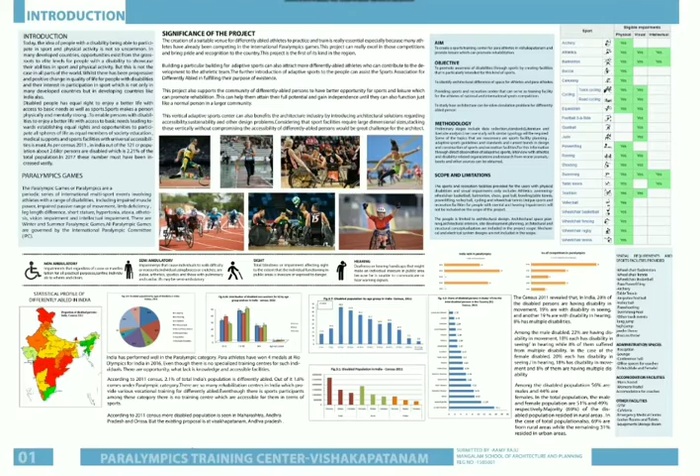My thesis topic is Paralympics Training Center in Visakhapatnam, Andhra Pradesh. It is mainly a live proposal. Project Introduction: the main aim of the project is to create a sports training center for para-athletes in Visakhapatnam.

The main scope and limitation of the design is that it includes user categories like physically disabled and visually impaired people, physically disabled like wheelchair users, limb deficiency and leg length differences, and visually impaired like partially and fully blind people. Sports and recreation facilities for people with mental and hearing impairment are not included in the scope of the project.

Talking about the feasibility of the project, according to the 2011 census, 2.1% of the total population is differently abled, out of which 1.6% comes under the Paralympics category. There are many rehabilitation centers in India, but there is no training center accessible to them in terms of sports.

According to 2011 census, more disabled population is seen in Maharashtra, Andhra Pradesh and Orissa.

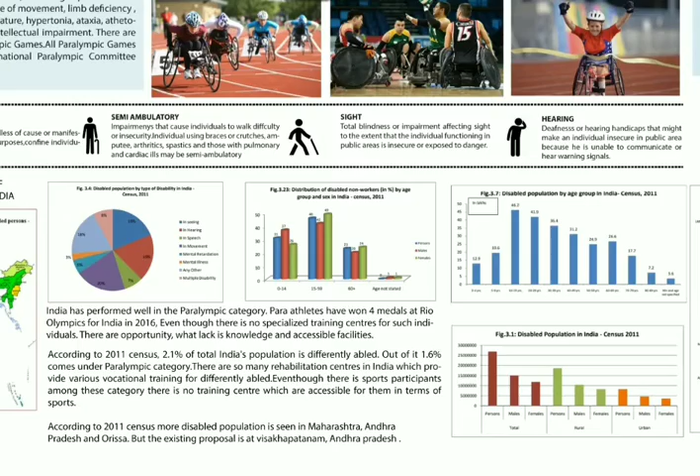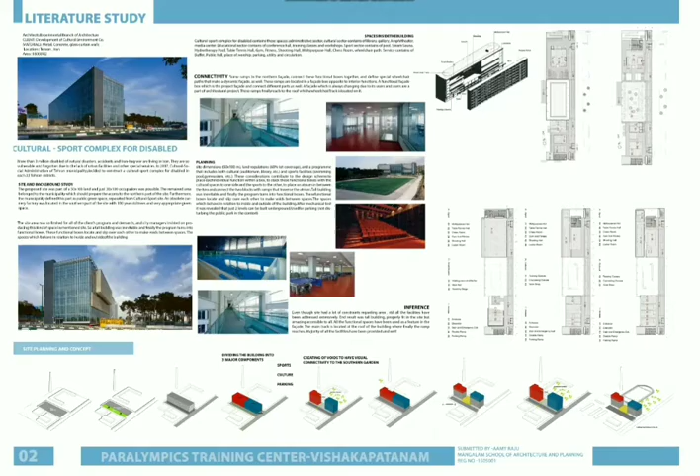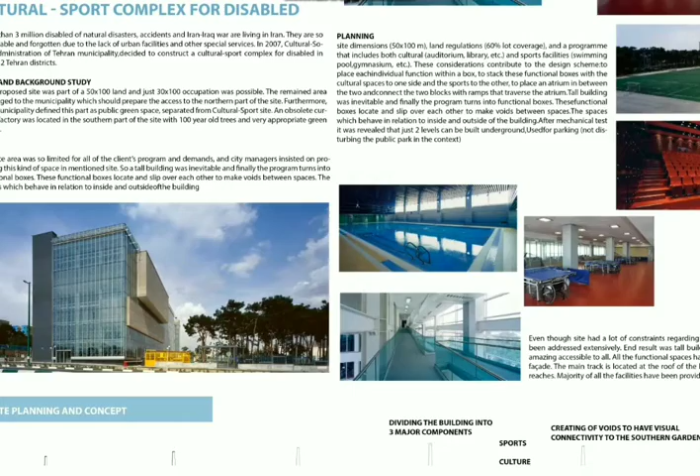Literature case study: Culture Sports Complex for Disabled in Iran, by Experimental Branch of Architecture, having an area of 18,000 square meters. The site has a lot of concern regarding the area - the site was limited, still all the facilities have been addressed extensively. The end result was a tall building properly fit in the site and accessible to all.

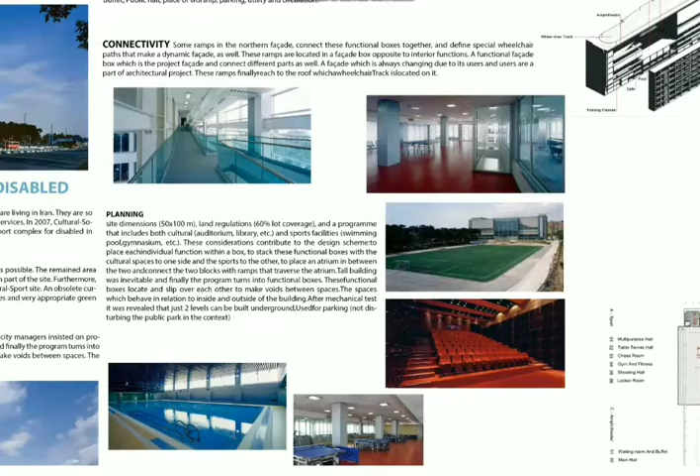The space inside the building is divided into three sectors: administrative sector, culture sector and educational sector. There is no other outdoor play area provided and also no accommodation provided within the building.

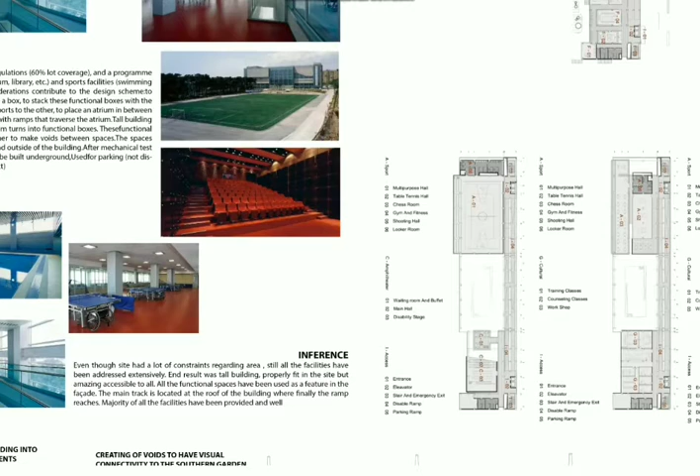The functional blocks are located and slip each other to make voids between them. These spaces are connected by ramps in the northern facade. It connects these functional boxes together and defines a special wheelchair path that makes a dynamic facade. This ramp finally reaches the roof where the wheelchair track is located.

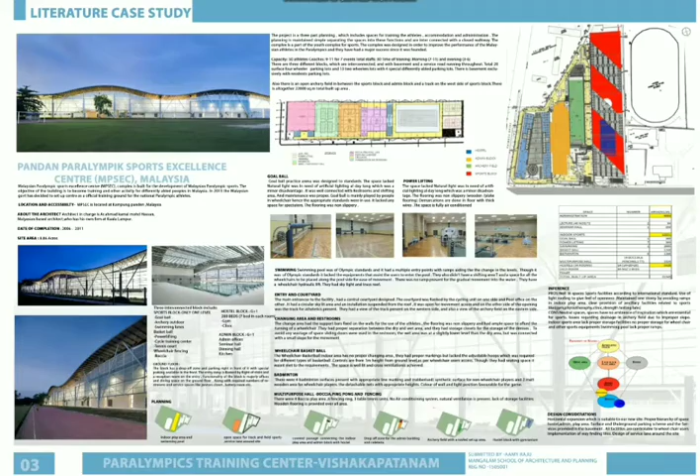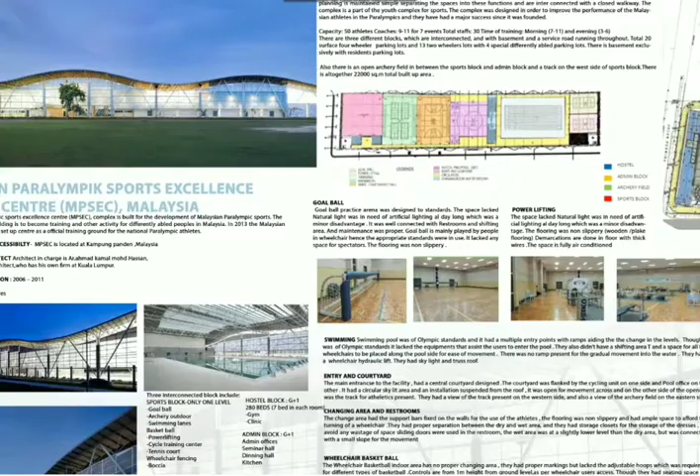Pandan Paralympic Sports Center in Malaysia, by Malaysian-based architect Ark Ahmad Kamal, having a site area of 8.86 acres. The site is divided into three parts: sports block, admin block, and hostel block. It is maintained as one-story to avoid ramps in the indoor play area.

It also follows international standards - flooring provided is non-slippery. Controls provided are 1 meter height from ground level as per wheelchair users. The planning is maintained simple, separating the space into functions interconnected with closed walkways. All the facilities are accessible to wheelchair users.

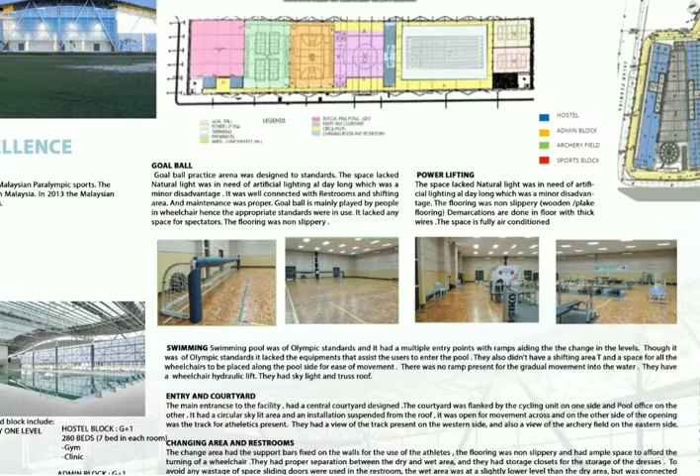Implementation of wayfinding checks is one of the main advantages. The main disadvantage is that the swimming pool lacks proper accessibility, and also spaces use dull colors and have a long distance to the field.

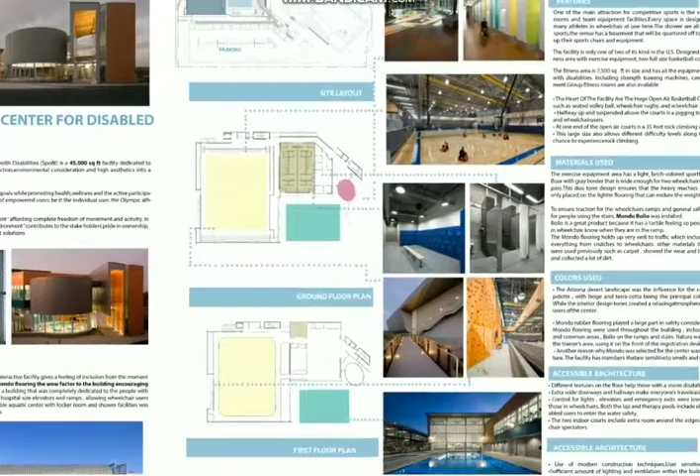The complex has a very compact planning with specific form. Both fitness as well as sports facilities are given equal importance. They provide hospital-size elevators, Mondo flooring for safety consideration, and also provide an accessible aquatic center with locker rooms.

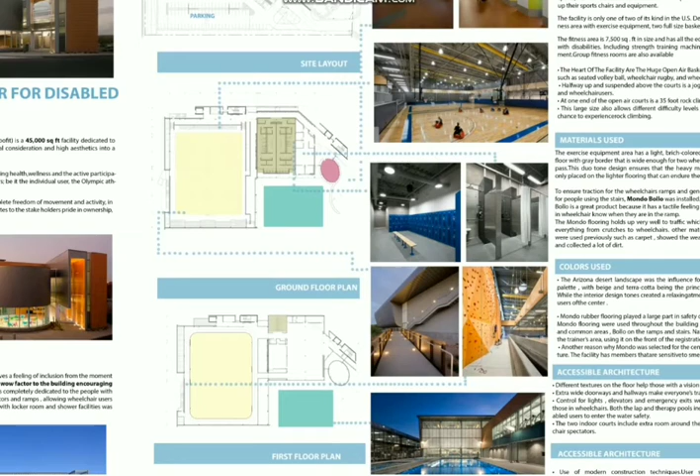Different textures on floor help both vision disabled and wheelchair users. Even the smallest of details are given importance. They also use proper material for safety as well as aesthetics.

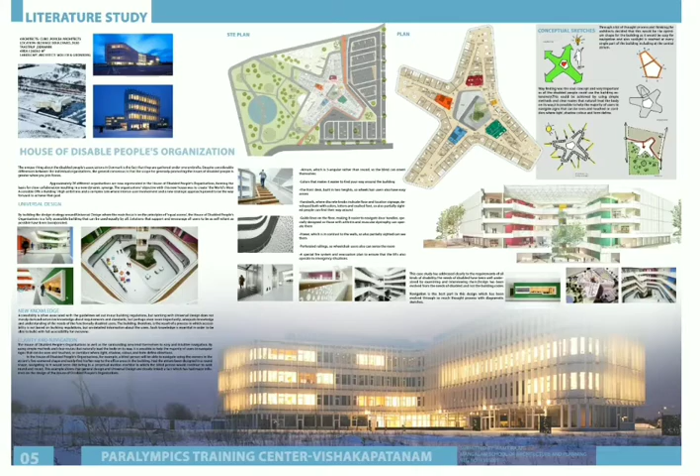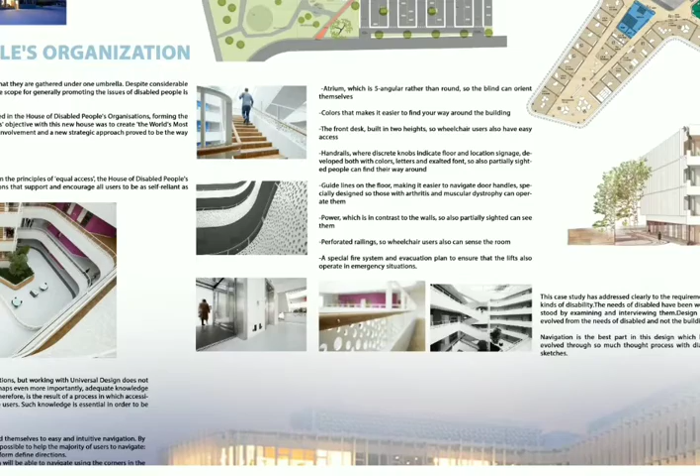Next is House of Disabled People Organization. This case study helps us understand the features and spacing for disabled people, like providing colors, handrails, guidelines, contrast colors, perforated railing, etc.

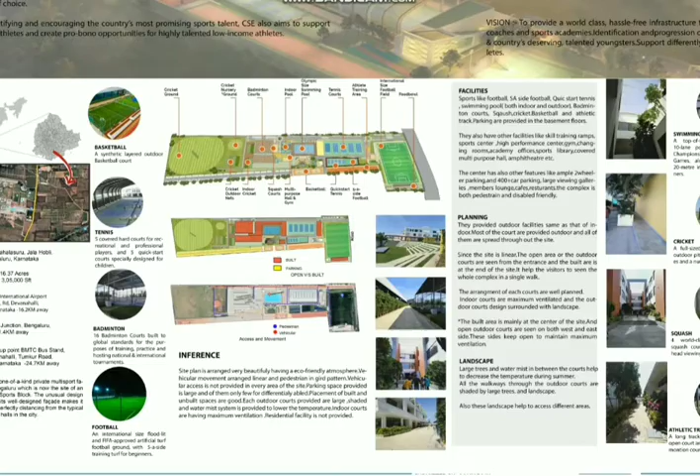Next is the live case study, the Padukone Dravid Center for Sports Excellence, located in Bangalore, having a site area of 16.37 acres. The provided facilities include basketball, tennis, badminton, football, swimming, cricket, squash, etc.

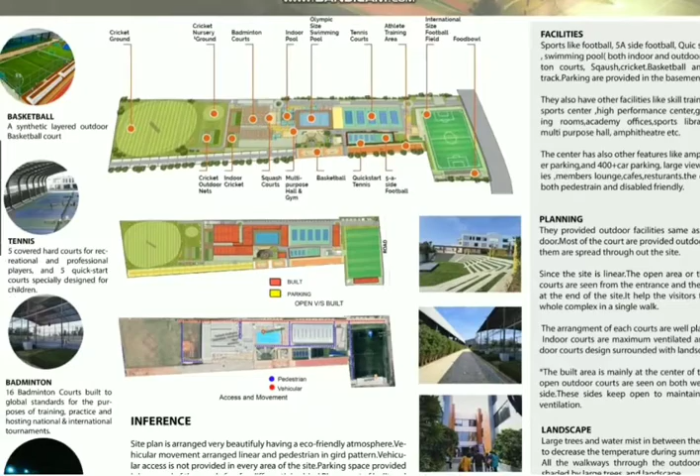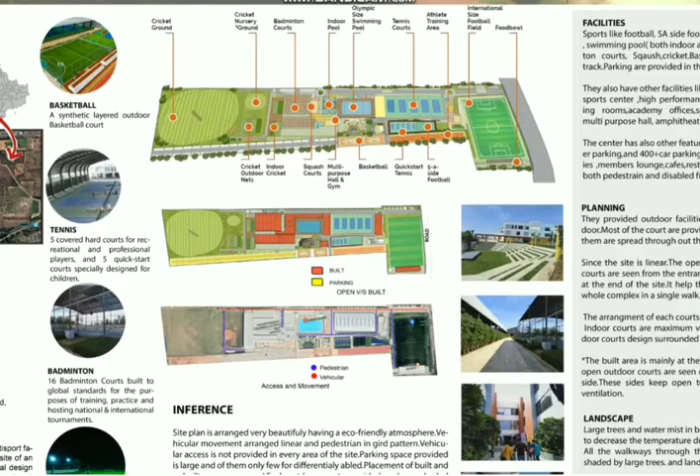The site is mainly linear. Indoor and outdoor play areas are given equal importance. Arrangement of each court is well planned. Indoor courts are maximum ventilated. Outdoor courts are designed surrounded with landscape. They also provide disabled parking, entrance ramp, and toilets for disabled.

Next live case study is the National Association for Blind, Bangalore. This case study is mainly used to understand the space and features used for blind people - features like providing color contrast for steps, handrails, doors, etc.

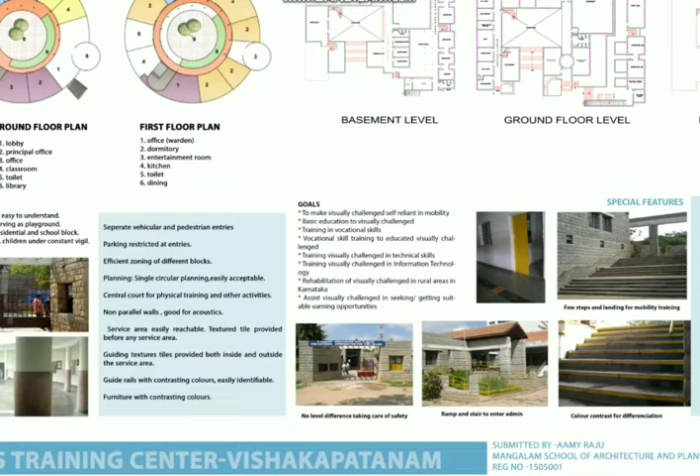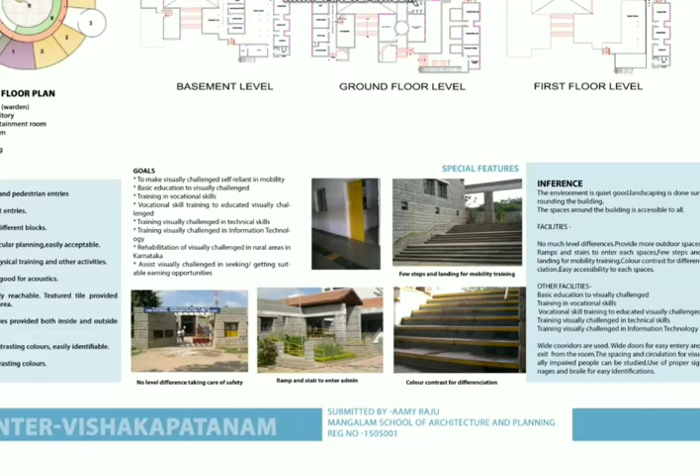Avoiding level differences, using wide corridors, wide doors for easy entry and exit, also use of proper signages and braille for easy identification. These are the comparative analysis of the case studies.

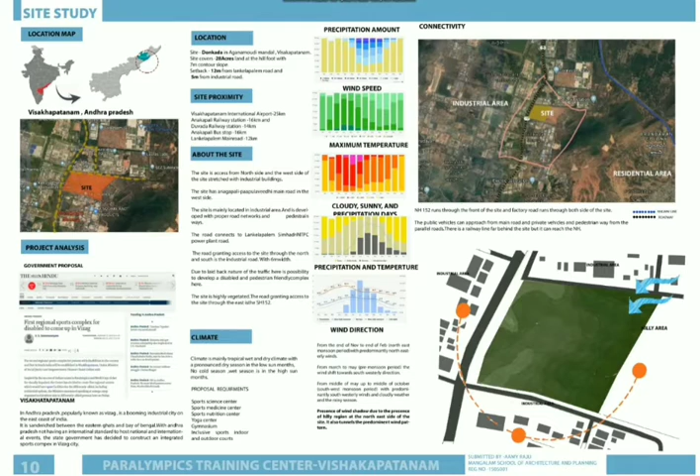Next is site study. The site is located in Visakhapatnam, Andhra Pradesh. It is basically a live proposal, located in Donkada region of Agonamoodi in Visakhapatnam.

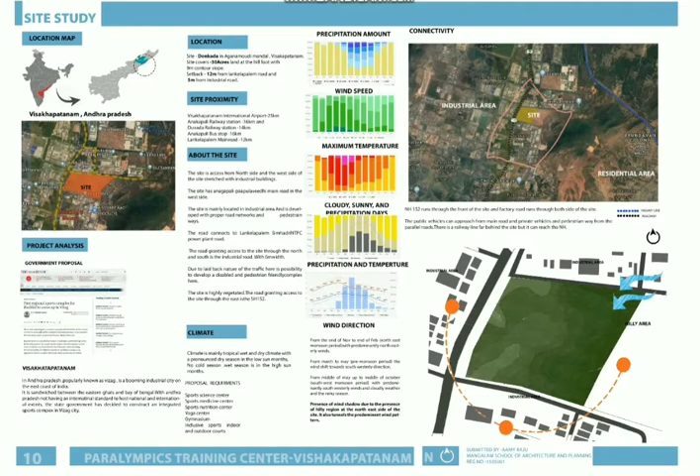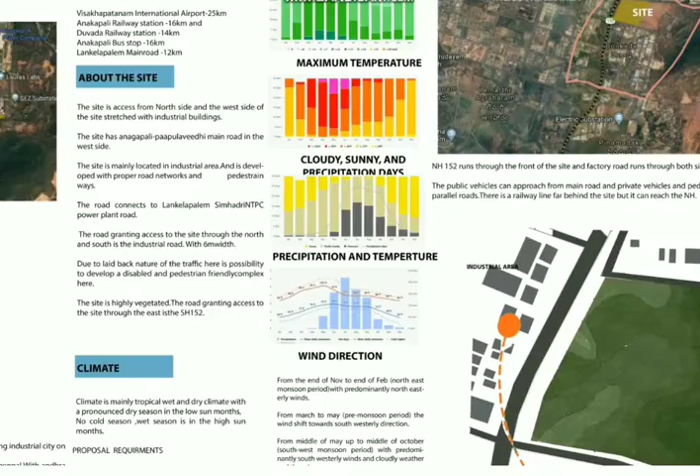It covers 30 acres of land. Also, it is located in an industrial area and is developed with proper road network and pedestrian walkways. The site consists of a 9-meter contour slope.

Site analysis: NH 152 runs through the front of the site. Also, the existing road surrounding the site can be used as service road or pedestrian roads. Also, at the right side of the site is a hilly region which provides a good backdrop to the complex.

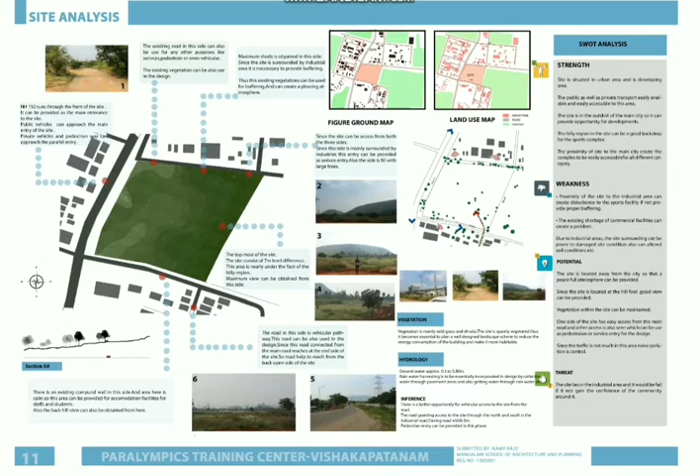Next is design brief. The total built-up area is 16,411 square meters.

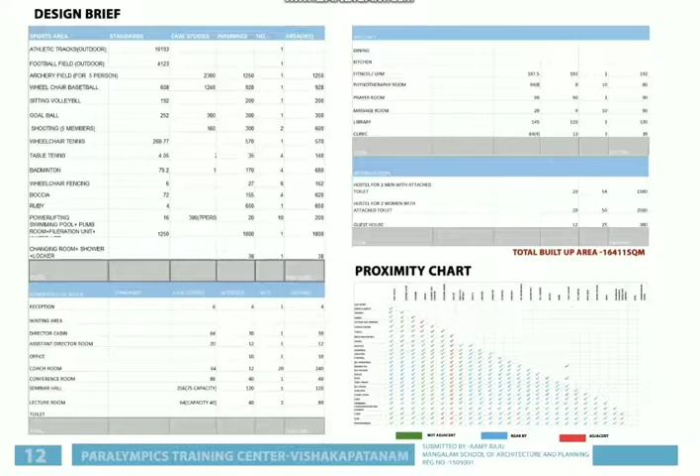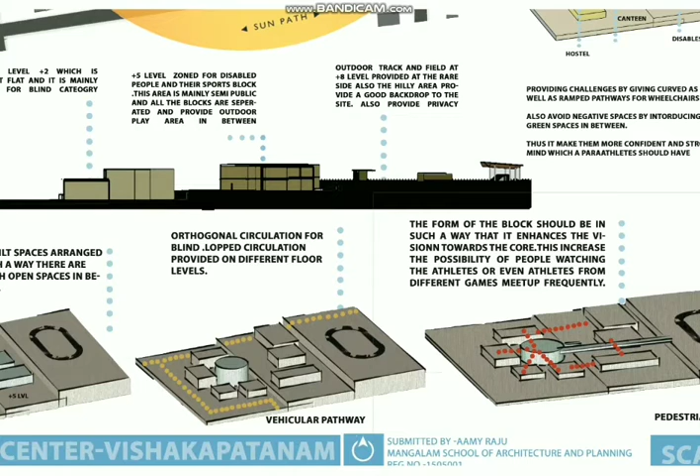Site plan: the site is located in Visakhapatnam. The site is divided into 3 levels - plus 2 level, plus 5 level, and plus 8 level. The site is zoned based on user category.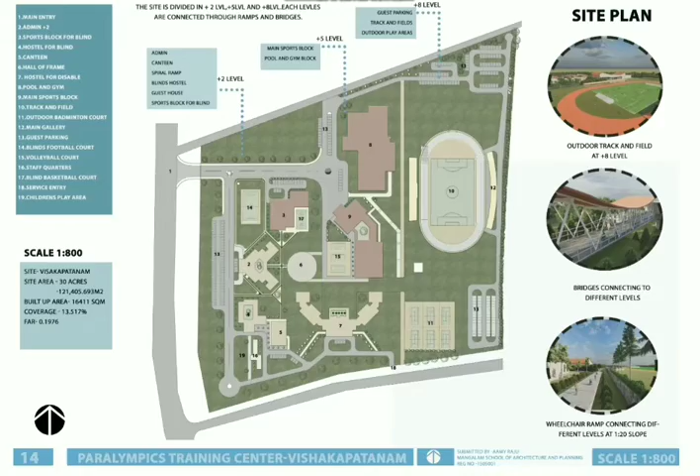The entrance is from the main road, which reaches the admin block at plus 2 level. This level is zoned mainly for the blind category. Other than admin, it also provides a sports block for the blind and a blind hostel.

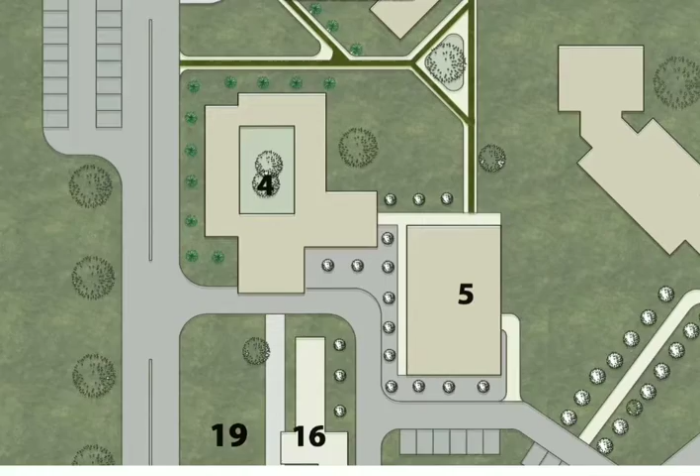Other than that, there is a common canteen, guest house, and Hall of Fame. The Hall of Fame is a central core block which is connected to each level through bridges for easy access for disabled.

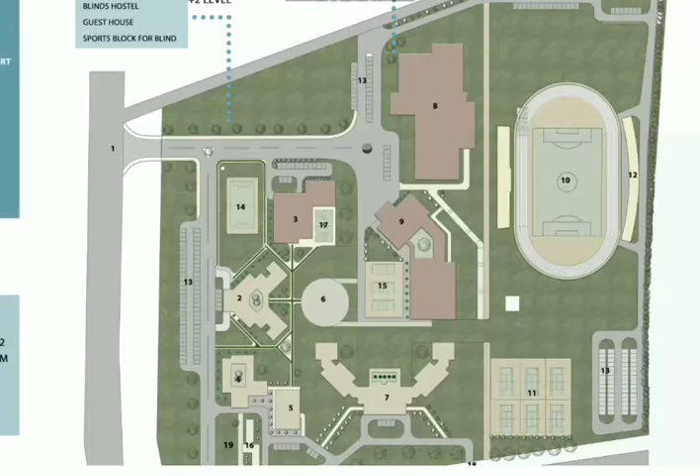At plus 5 level, it is mainly zoned for disabled people, having their main sports block, pool and gym block. Also, hostel for disabled.

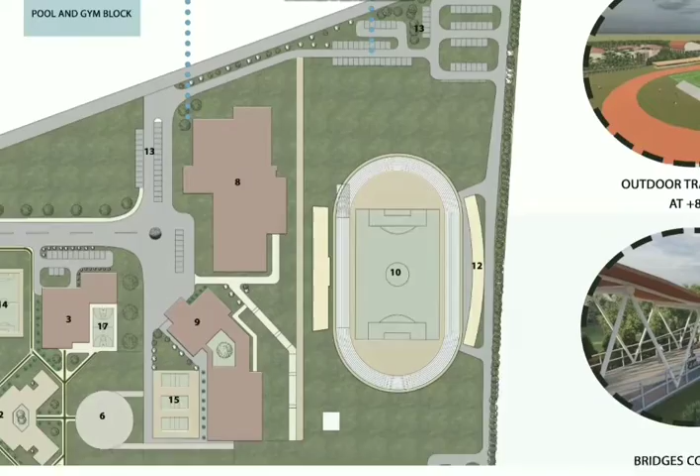Plus 8 level is zoned mainly for outdoor track and field. Parking is also provided in this area. The hillside near the play area provides a good backdrop for the complex.

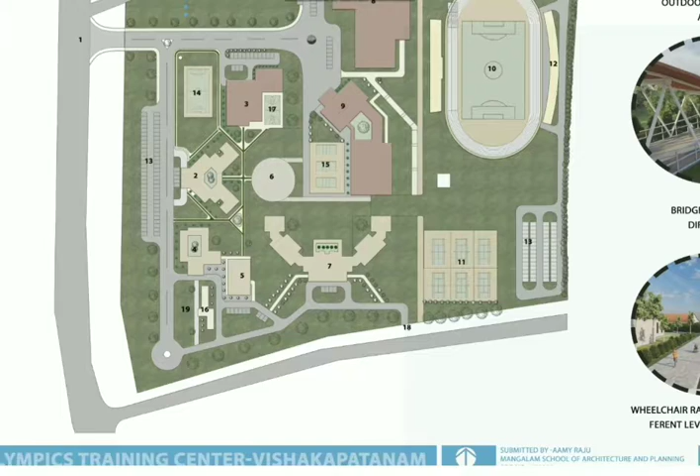These are the wheelchair ramps connecting different levels at 1:20 slope. These are the bridges connecting different levels and outdoor track and field at plus 8 level.

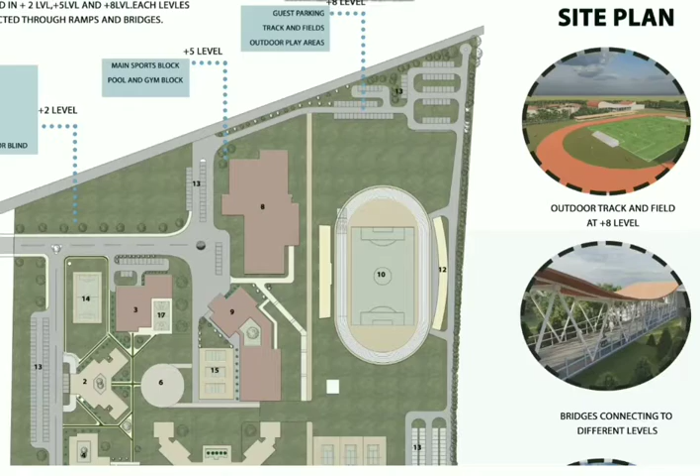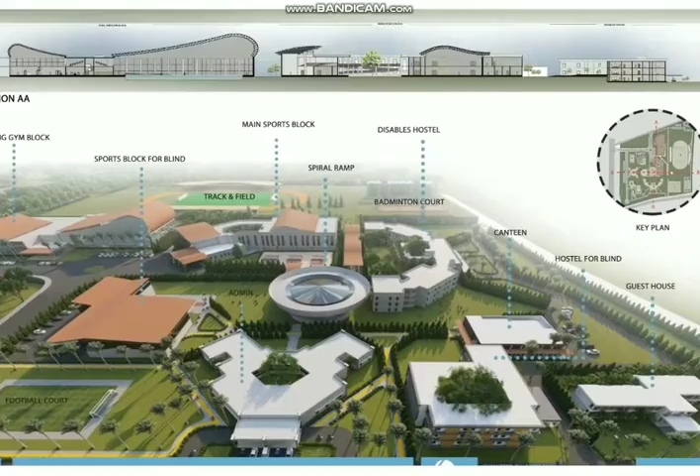Site section BB and site section AA. This is the overall view of the site showing admin, sports blocks, pool and gym block, track and field, hostels, canteen and guest house.

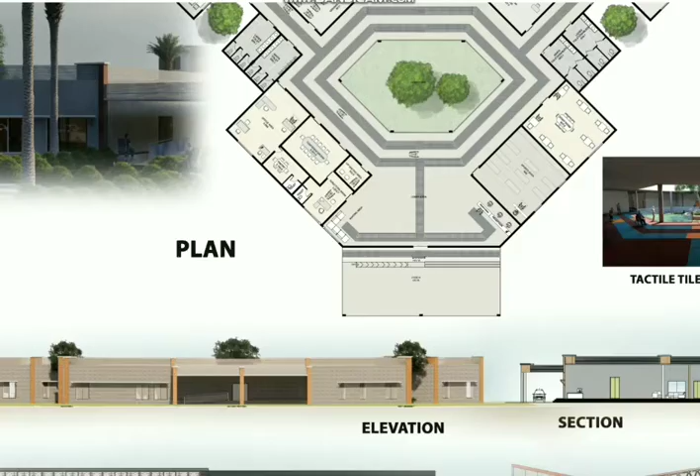Provided ramps and steps at the entrance, tactile tiles for blind, wide corridor of 4 meter width. Office spaces are provided at the front, separate toilet space for staff.

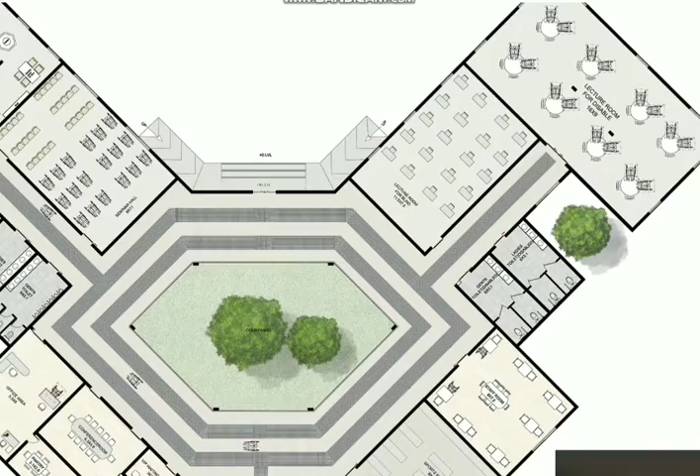Other facilities like library, seminar hall, lecture room for blind and disabled are provided. Separate toilet for disabled are provided. View of tactile tile and courtyard views.

Next is the floor plan of sports block for blind at plus 2 level. Sports provided are mainly for blind like goalball, badminton and judo. Tactile tiles surround each court.

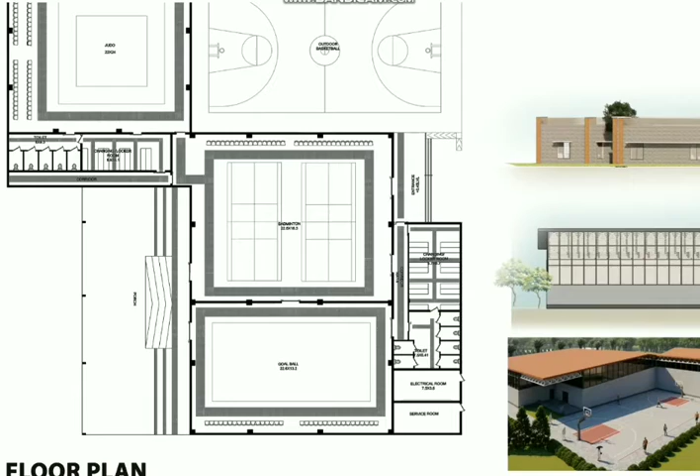Each court containing separate changing room, locker room and separate toilets. Separate seating are also provided within the block. This is the outdoor basketball near the sports block.

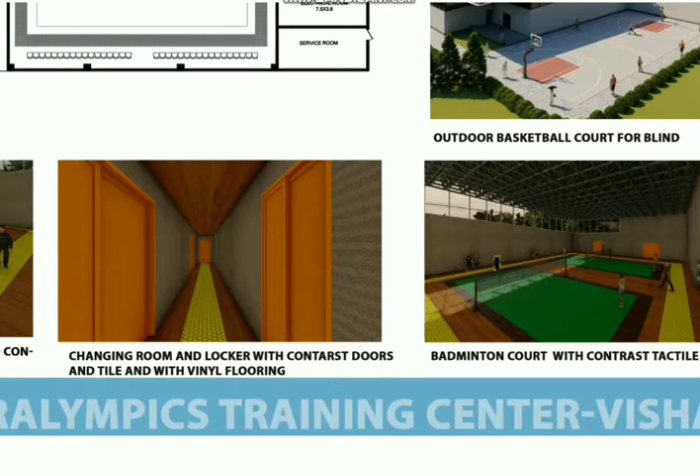This is a view of changing room and locker room with contrast doors and tactile tile for partially blind people.

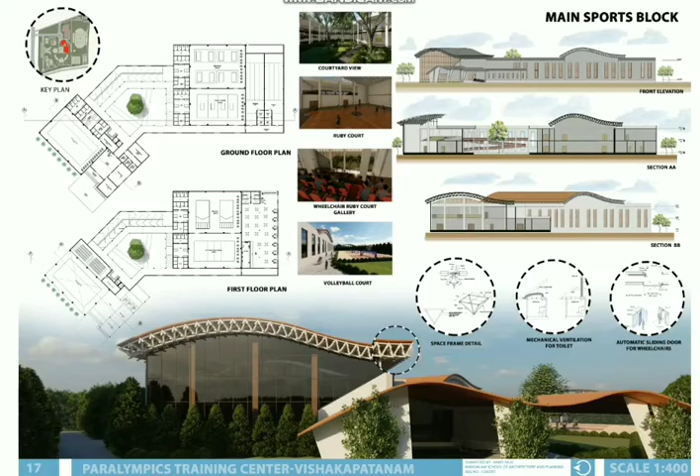Next is the main sports block at plus 5 level. This is mainly for disabled people. Key plan showing main sports block, ground floor plan and first floor plan.

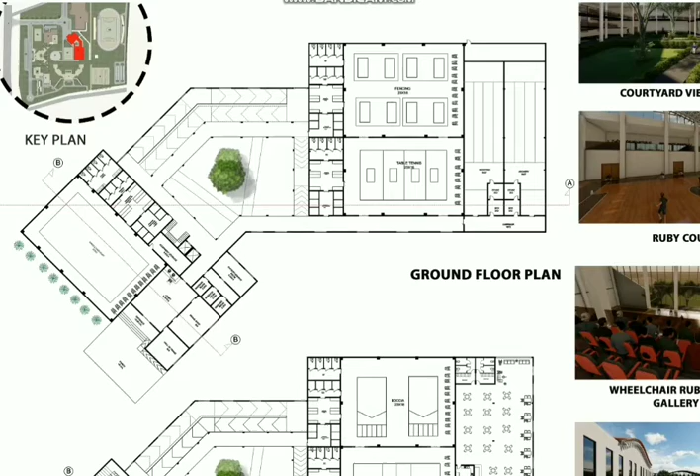The courts provided are mainly for disabled, like wheelchair rugby, table tennis, fencing, boccia and sitting volleyball. Each space contains separate toilet, wheelchair replacement room, changing room, etc. Also provided shooting and archery.

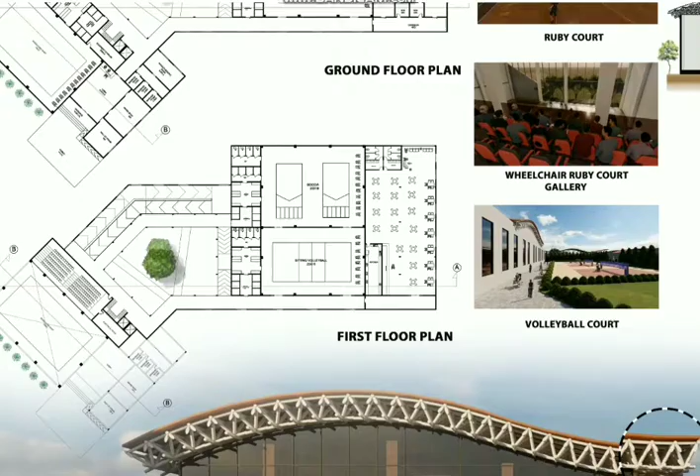Ramps having slope of 1:20 are provided to access the first floor. Gallery spaces are provided within the block facing the wheelchair rugby court. Also provided a cafeteria at first floor.

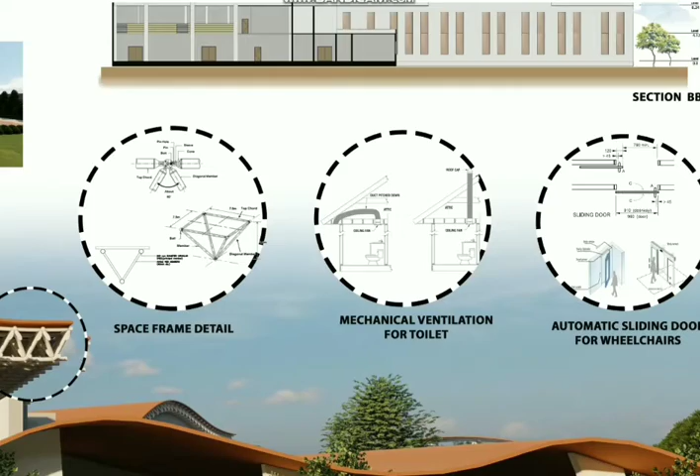These are the views showing gallery space, rugby court and courtyard view. The block contains space frame structure. These are the technical details of the space frame. Toilet is mechanically ventilated and all the doors are automatic sliding doors for wheelchairs.

Next is the pool and gym block at plus 5 level. This is the key plan showing the block. This is the ground floor plan and first floor plan.

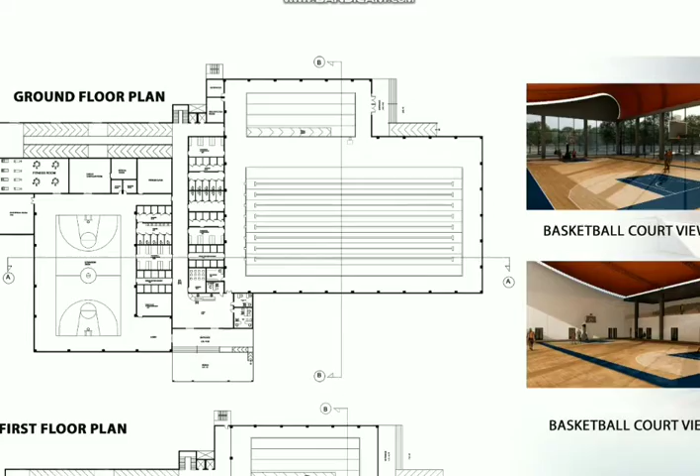It provides ramps and stairs at the entrance, a wide central corridor, contains a basketball court and a swimming pool, also a small fitness room.

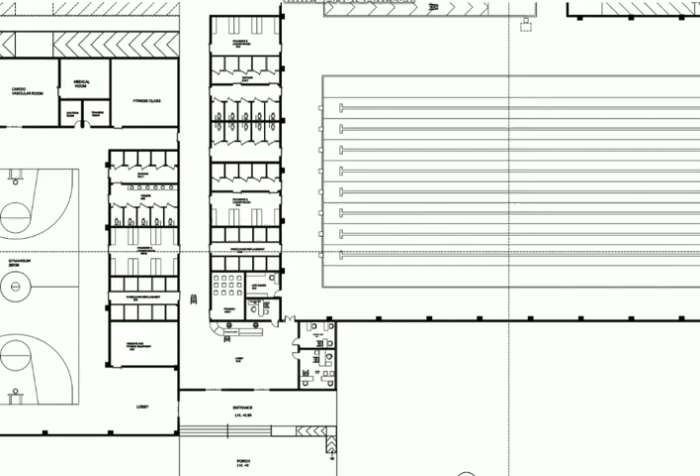The swimming pool also contains a hydrotherapy pool, which provides pool ramp and pool lift for disabled. Each of them contains separate toilet, changing room, locker room, etc. Ramp is provided to access first floor.

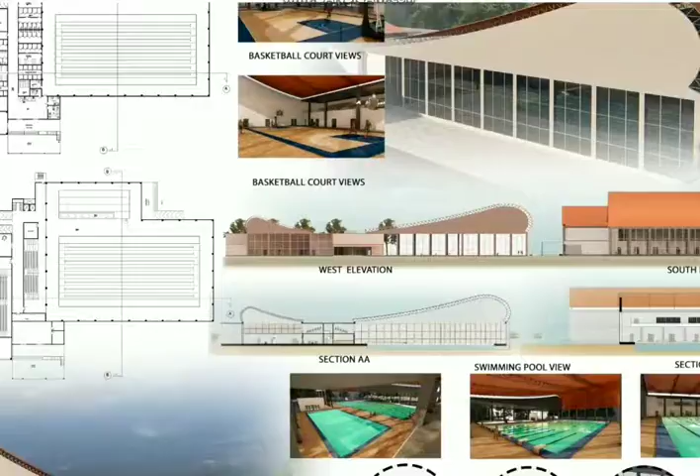First floor mainly contains gallery space for the swimming pool and basketball. These are the elevations and sections showing pool and gym block. These are the swimming pool views.

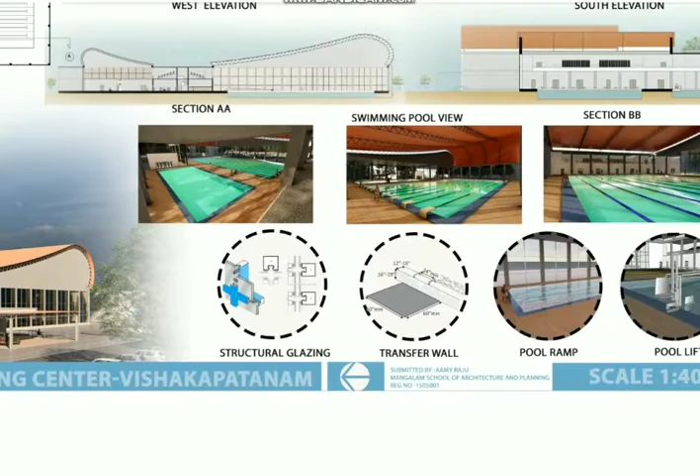Also having details of structural glazing, transfer wall, pool ramp and pool lift, which are main pool access for disabled.

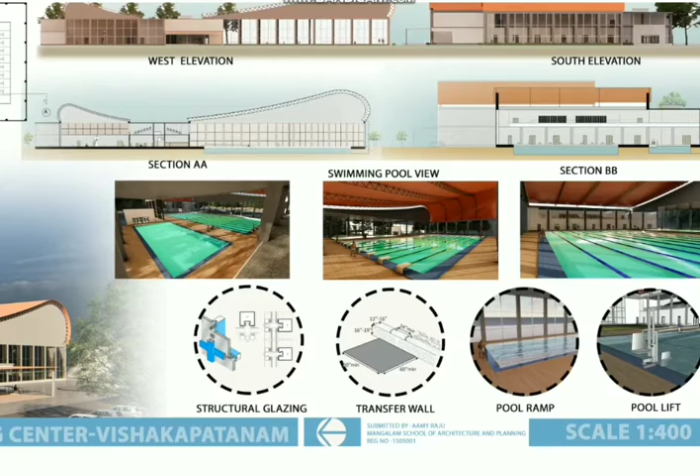Next one is Hall of Fame at plus 2 level. It is the core building of the complex. This block connects other levels through bridges. These are the section and elevation of the block.

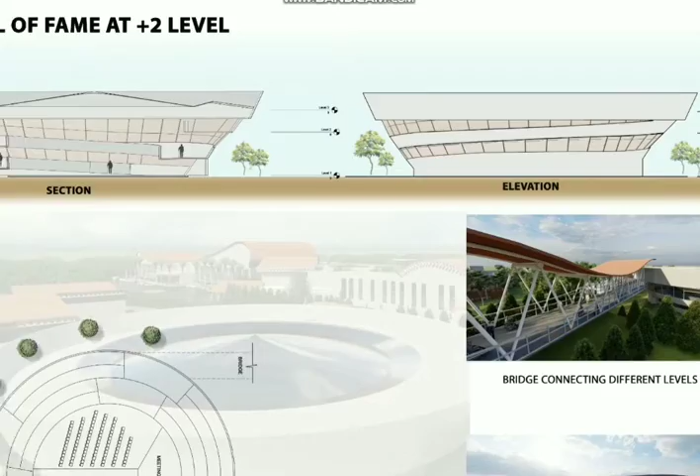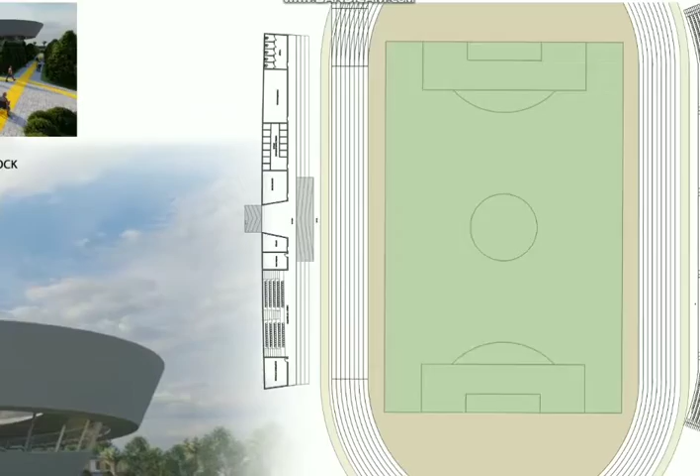Track and field is at plus 8 level. It's mainly a large play area. Also have provided a small block near the track and field.

It contains coach room, wheelchair replacement room, changing room and toilet for the athletes who participate in track and field sports. It also contains VIP seating within the block.

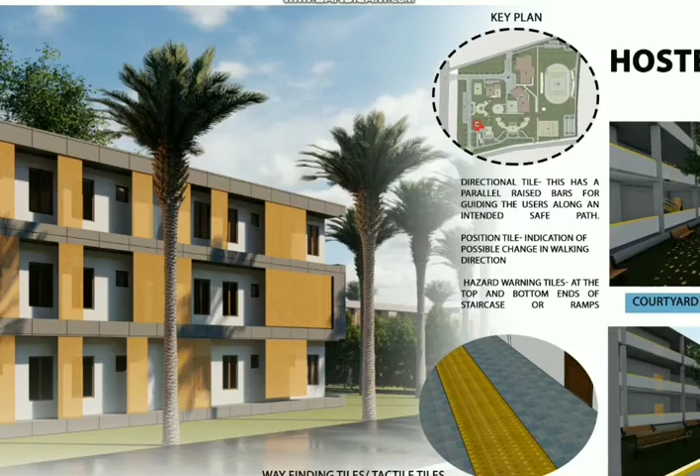Next is a hostel for blind. It's a key plan showing hostel for blind. It's a 3-storied block having a central courtyard and tactile tiles provided in the corridor.

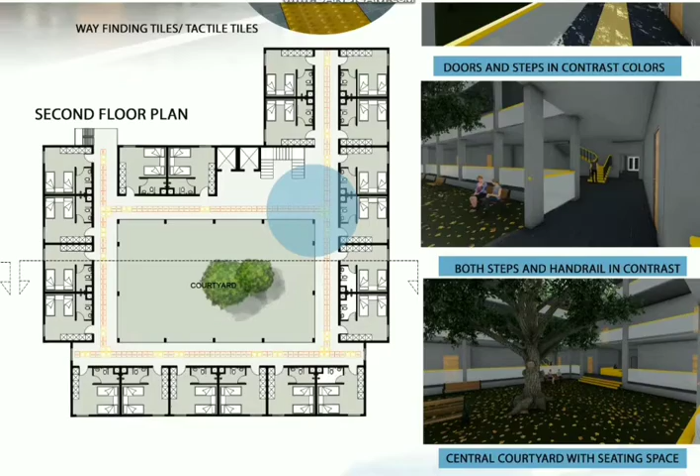Next is hostel for disabled at plus 2 level. It is a 3-storied block containing a ramp of 1:20 slope. It also provides rooms for caretakers.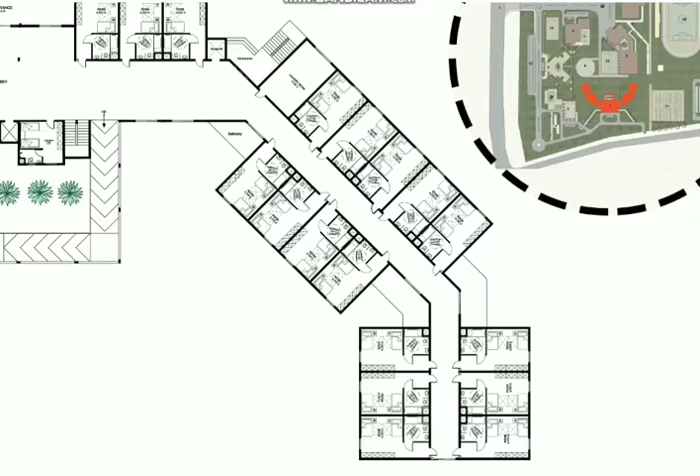The rooms and toilet are easily accessible for wheelchair users. They also provide roll-in type showers for disabled, a dining space at the first floor and a prayer hall at the second floor.

These are the elevations and section of disabled hostel. Next is staff hostel and canteen at plus 2 level. Staff hostel is a double-storied block.

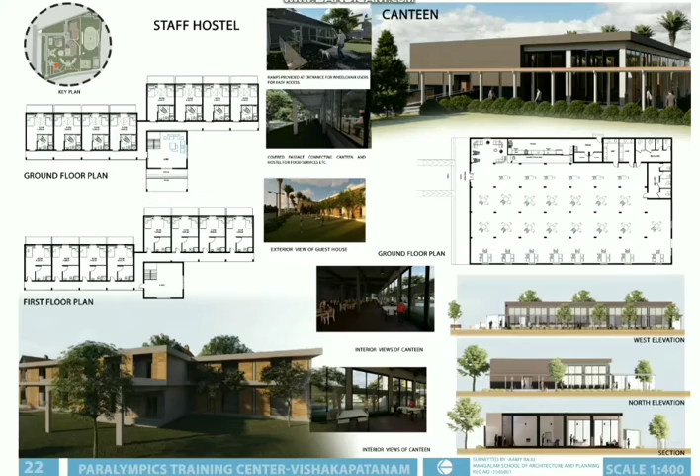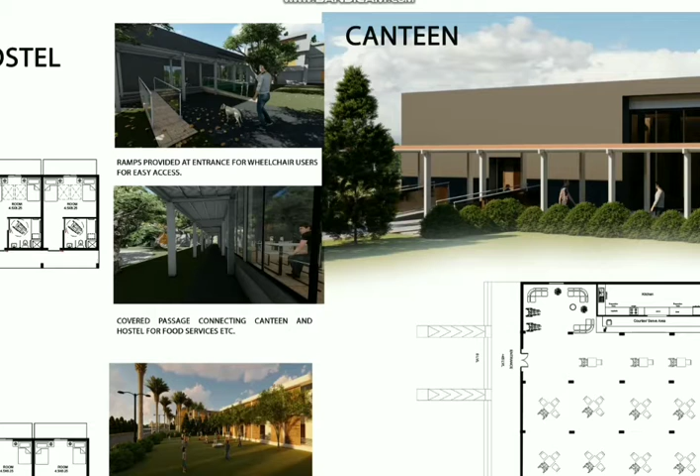The ground floor contains wheelchair accessible room and toilet. Canteen contains seating of 100. These are the covered passage connecting canteen and hostel for food service.

Ramps provided at the entrance of the canteen for easy access. Elevations of canteen, interior views of canteen, view of guest house.

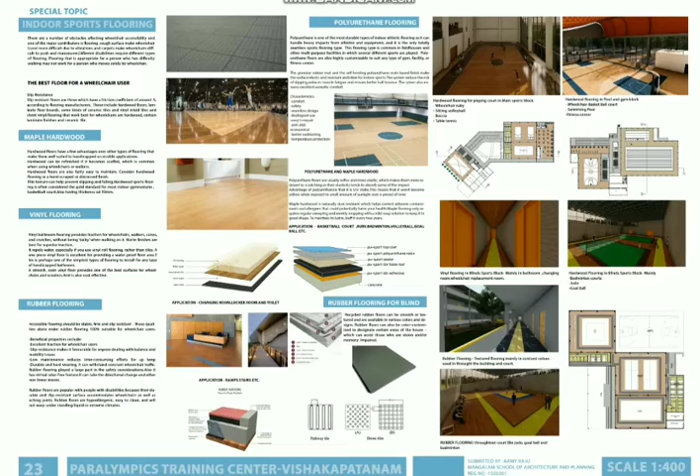Special study of indoor sports flooring. Best flooring for wheelchairs are maple hardwood, vinyl flooring, rubber flooring, polyurethane flooring. Application: hardwood flooring for sports courts like rugby, volleyball, boccia, table tennis, basketball court, etc.

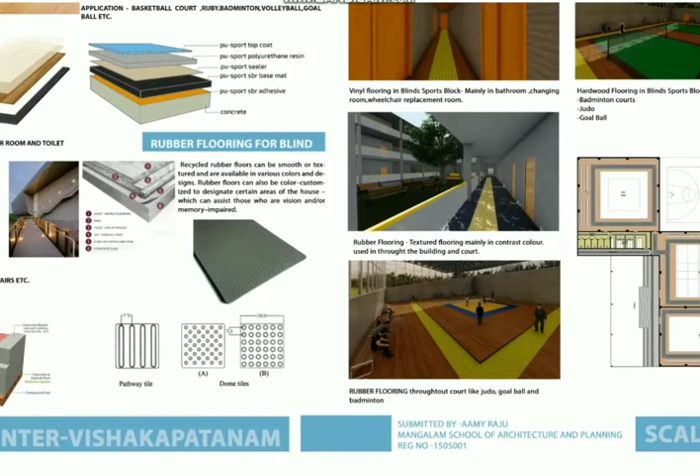Vinyl flooring is best for toilet, changing room and locker room. Rubber flooring is textured flooring, mainly in contrast colors for partially blind people. They are applied throughout the courts like judo, goalball and badminton.

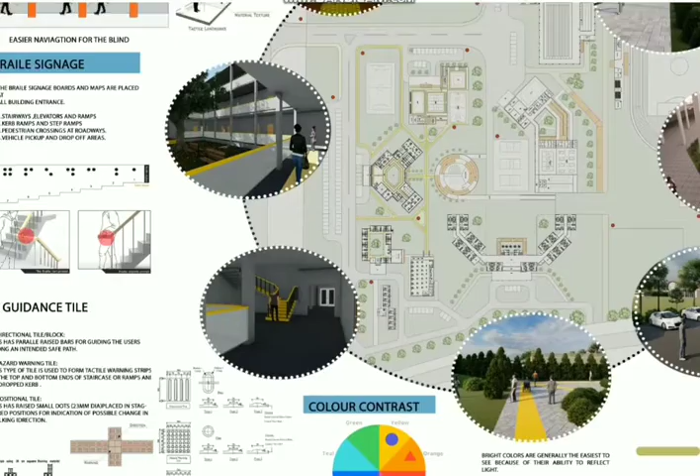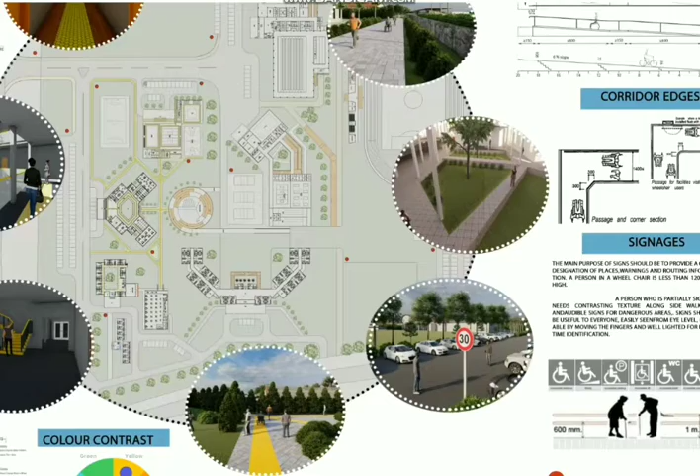Wayfinding map sheet for both blind and disabled, providing braille signages, guidance tiles and color contrast for blind, wheelchair ramp for wheelchair users, corridor edges avoiding 90-degree angles, signages at parking, etc.

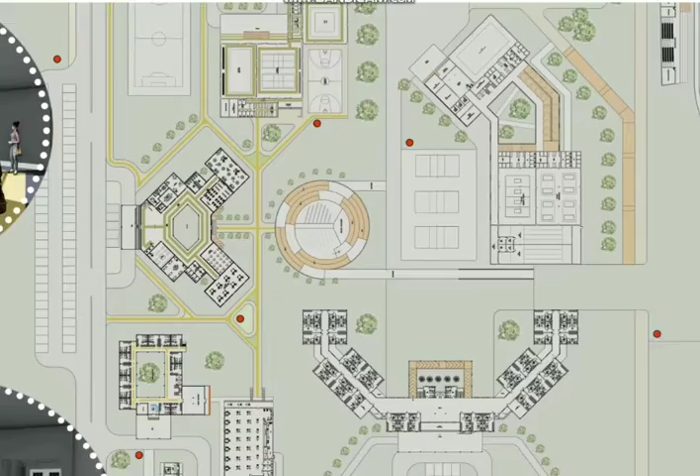Application at site: providing tactile tiles throughout the site, ramps within and around the building, information signages throughout the site. Physical model sheet.